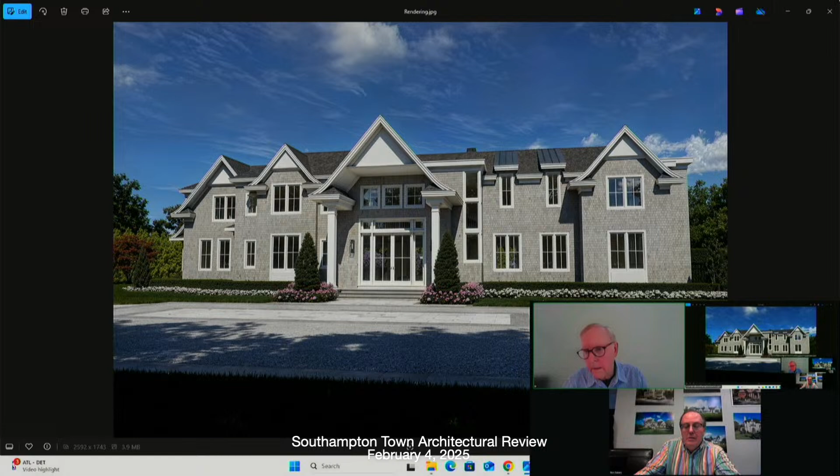Oh, Michael can't see it because he's not here. Okay, I didn't think that—right, he can't see our screen. Right, I got that one. It should be—yeah, do and shift. Yeah, I see one of them, but I don't see it large. Mr. Rump, can you see the rendering? Yes. Okay, I'm working on getting a few of them uploaded. Okay, fine.

Mr. Chairman, may I ask a question? Oh sure, absolutely. Kelly, is there a landscape or planting plan that was referenced—is that available? There was a landscape plan that was submitted by Piscatelli Landscape Architecture.

Okay, Mr. Rump? Yes, sir. My comments are going to be based on this—I wanted you to look at the landscape plan, because being a 10-bedroom house, is there going to be enough screening, and would there be noise abatement? I did upload a few of the renderings, which you should have access to. I could also upload the landscape plan if that's helpful, Mr. Chairman. Yes, it would be. Okay, yeah.

Are you able to share your screen rather than drop them in the chat? I do not know how to do that. I apologize.

20 Luther landscape plan, 1211, 1211. I think this is the latest and greatest. Let's...

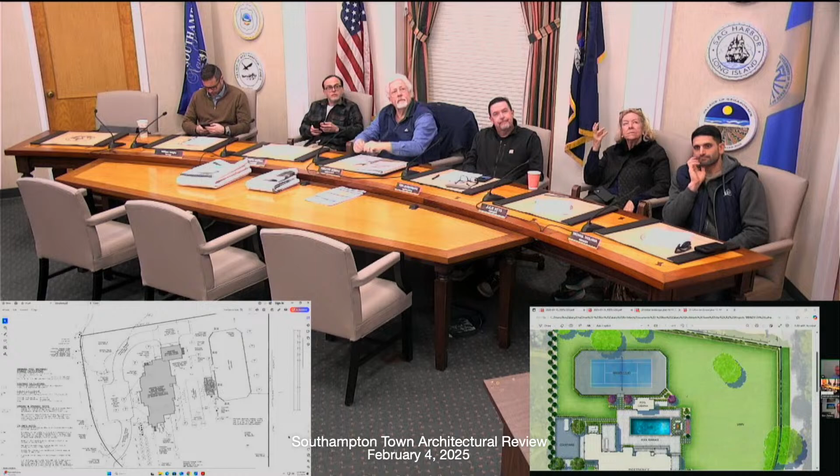Okay, check. Video, audio. Copy invite link, participants. Or share. Let's see. Okay, there you go. How's that? Yeah, we've got it. Yep. All right, good. Sorry about that. First time I've done that, actually. That's all right, we're all learning.

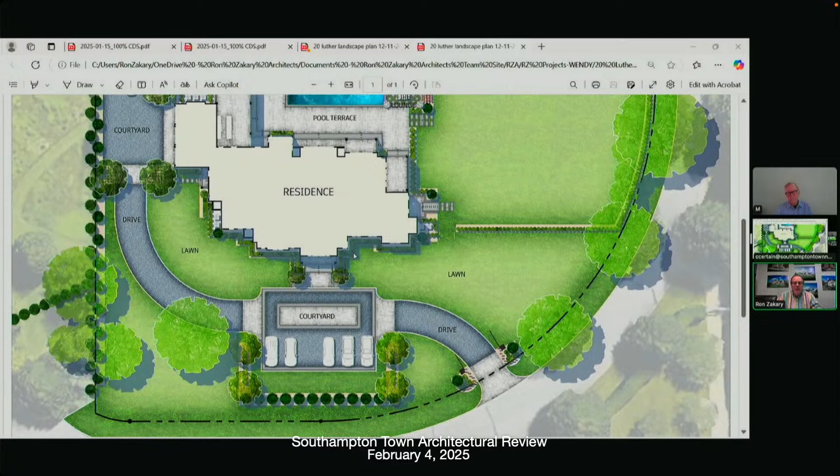Okay, so as you can see, the single curb cut, we have a courtyard opposite the main entrance, which will allow us to park 4 or 5 cars. There will be some hedgerow and evergreen screening for that motor court area. And to the left side, which is the abutting 8 Luther property, there will be staggered evergreen screening for the benefit of both 8 and 20 Luther.

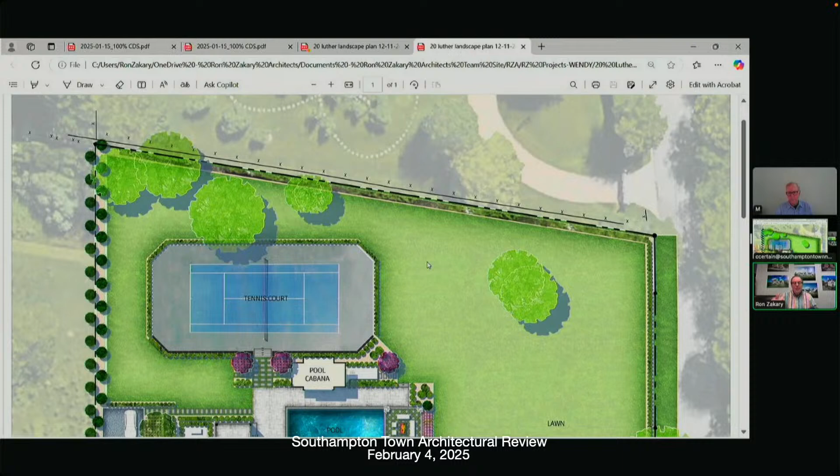There's a fair amount of vegetation on the east side. There are some large trees that we're going to maintain and some evergreen screening that's already there, so that side is already nicely screened. And then the definition of the lawn area to the right will be, again, evergreen screening that wraps from the right side of the front of the house towards the street and then continues on the curve heading east to that existing vegetation on the east side of the property.

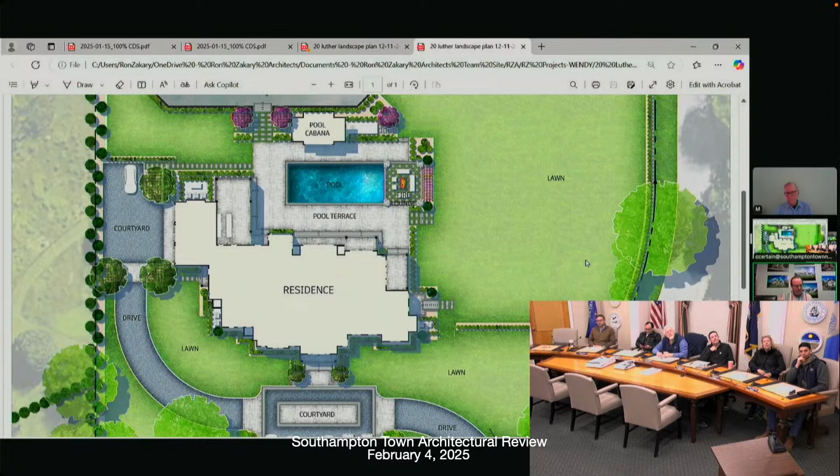So, Mr. Rump, would you mind commenting on my comments about noise abatement, and is this going to be sufficient screening? Well, I have a question for Ron.

It's so west of the hedge that's kind of defining that lawn area to the right, along the property line. There's going to be no screening along the property line until that kind of northwest corner. Is that correct? To the right of the curb cut before you get to the screening? Yeah, if you go from the curb cut, either left or right.

Well, to the left, there'll be screening that defines and encases the motor court area, or the courtyard as it's called in the landscape plan. And to the right, as you're approaching the house, there are a couple of trees that we're going to keep there, so you will still be able to see the house. But the privacy screening really defines the backyard area. That front lawn area will simply be open lawn, just so you could actually see the house as you're coming around the corner and recognize the driveway entrance.

So I didn't want to extend that existing vegetation all the way to the curb cut. The existing vegetation that's there is not shown. There's a few trees along that southerly edge that we would like to keep, and then the new screening would start from the right front corner of the house, heading west, then heading south, then heading east along the property line. Right. So what I'm asking, Ron, is that this plan does not show that existing vegetation.

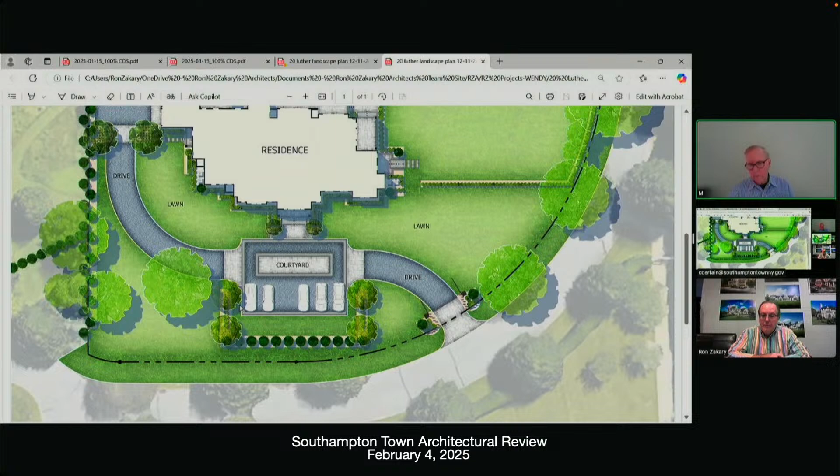Mr. Rump, comments on the design only at this point? I don't have an issue with the design of the residence. The only question I had, Mr. Chairman, is if the developer is doing a residence under construction next door - I don't remember what we approved for next door, and my hope is that it's not the same. No, it's not. It's a more modern look, I guess, is the best way to put it, at 8 Luther.

I could try to pull up a rendering, if that helps, of 8 Luther. Yes, if you could. It's a very different looking house. I guess the only commonality is it has a cedar roof. The windows are bronze, the siding is a different gray, and it's got more of a two-story glass wall look. So it's a more modern look.

I, for whatever reason, cannot pull up those files. Let me just see if I can - as long as Ron says that, I'll believe him. And that's just my concern, that we don't have a similar house next door to each other. Right, yeah, I vaguely remember it now. As he's describing it, it is different, and I believe there is enough screening on the house next door, the one that's going to be under construction.

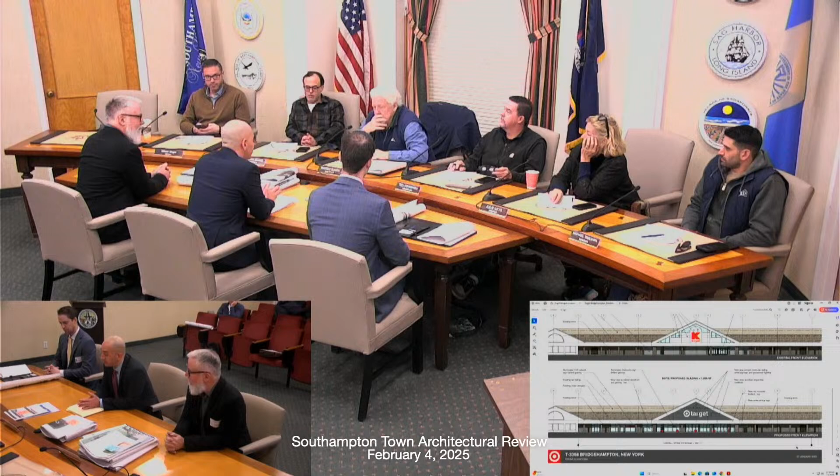Good morning, Mr. Chairman, members of the board. Brian Kennedy, partner with Forchelli Deegan Terrana, on behalf of the applicant. Present with me is Ken McQuaid, in-house architect with Target, and Alex Holloman, project engineer from Bohler Engineering. As the call of the meeting indicates, we are before the board this morning looking to occupy the former Kmart space at Bridgehampton Commons. It's approximately 91,000 square feet.

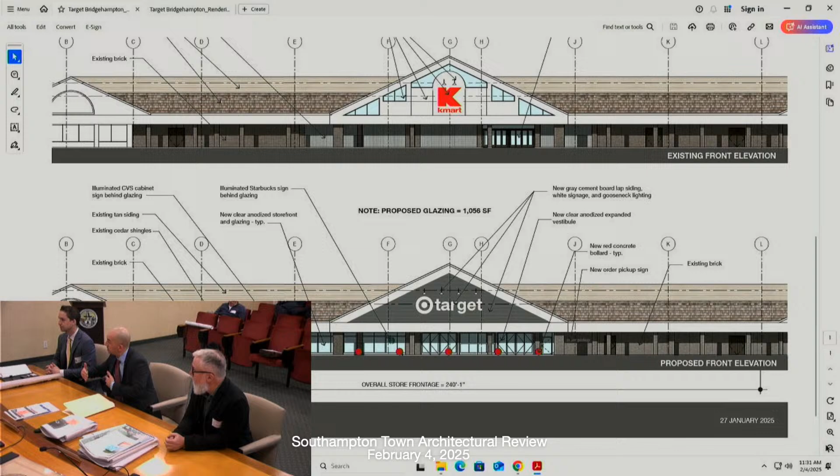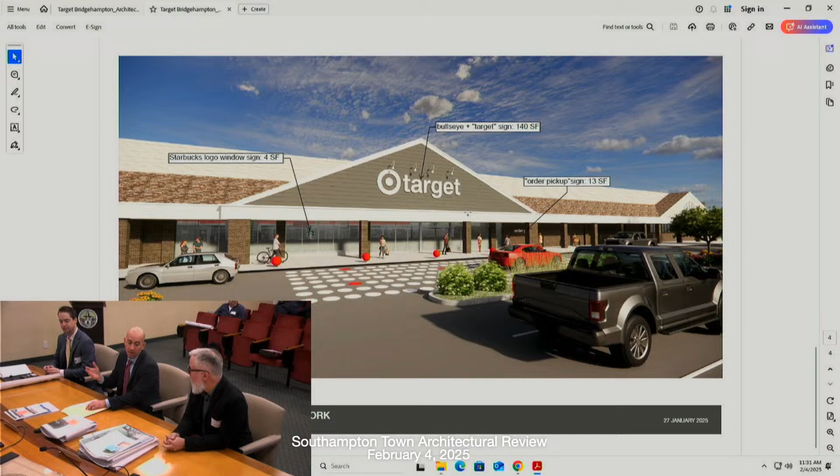As part of that occupancy, there will be some fairly significant upgrades to the facade. Additionally, the applicant is proposing the addition of 2 cart corrals in the parking area, which will trigger a minor parking variance. At the rear of the site, we're proposing some additional loading dock improvements.

At this point, I'm going to ask Ken to speak quickly to the proposed facade upgrades. Okay, thanks for having us. We're very excited to be here and be part of your community. I'm sure you're all familiar with the existing building.

It basically has the front vestibule of the current Kmart, and then everything else on the front wall is either brick or corrugated CMU from the original construction. And then there's a kind of a fan glazed window element up in the gable there where the existing Kmart sign is. So those are the two areas we really wanted to address in the design. The shopping center has a very consistent design, so we didn't want to do anything crazy.

The first element, the gable, we're proposing adding some gray siding to match the rest of the center and cover up the existing glazing, which you can't see through anyway. The main issue is our logo wants to tuck up in that half circle, and then it ends up looking kind of like the Japanese flag, like it's this weird red dot with a fan blade thing coming around it. And if you don't put the sign up there, it looks like it wants to be up there, but it just looks kind of strange.

So covering that up and putting in the gray siding really allows us to get our full horizontal lockup, and then we can get the gooseneck lighting over the top of it. It also just refreshes the exterior look a little bit and shows the public that there's something new going on.

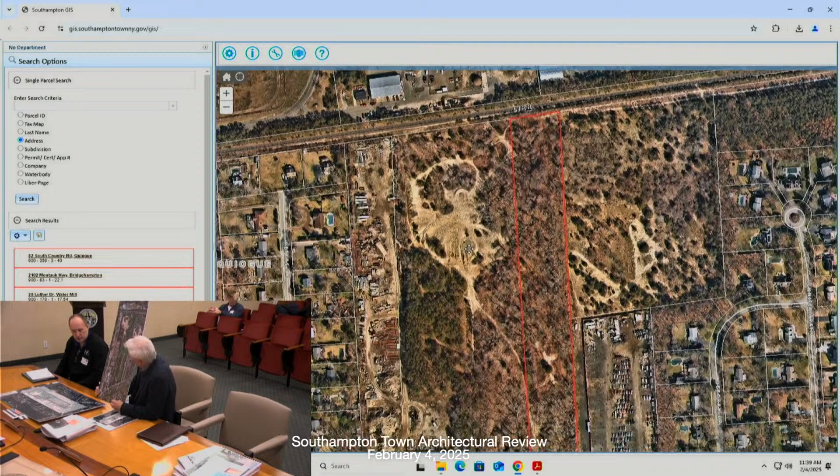Because of the past industrial uses, and actually current ongoing industrial uses, the town thought, this being PDDs being incentive zoning, that there should be an incentive for a developer to have some flexibility in uses of the property, provided there is a cleanup. We are presently undertaking the necessary environmental remediation plans, which are being reviewed by the DEC because of the impacts that were occurring. You can see the part primarily on the north part where there was sand mining taking place, but there was certain types of debris and metals that were dumped on the property years ago. We're confident that the DEC... they're not as significant as, let's say, the North Sea landfill kind of issue. So we believe we can develop this.

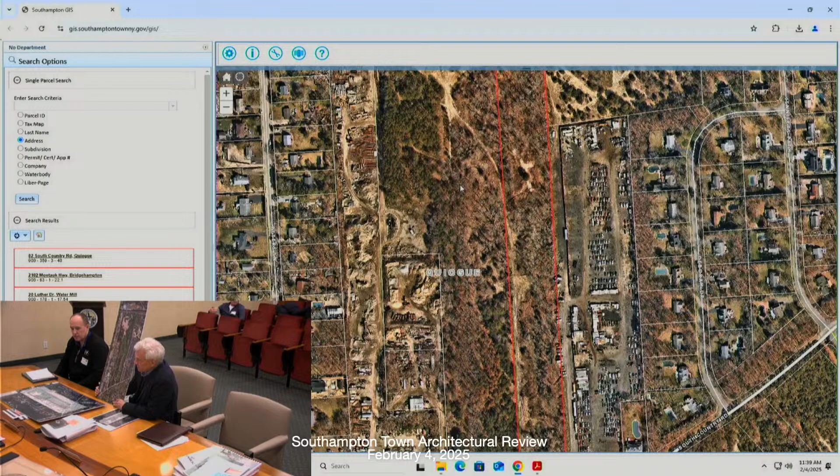Our clients are one of the premier car club recreational uses in the country. They have facilities, and Ryan can describe those, currently built in Florida. What they're looking for, a car club, is an activity where people with a hobby, more than a hobby, a real keen interest in cars, collecting cars, older cars, new cars, luxury cars, and they need a place to store them and actually share their affection of these cars with other people. This is something you may be familiar with. There's a lot of literature, and there is a website if you want to go there.

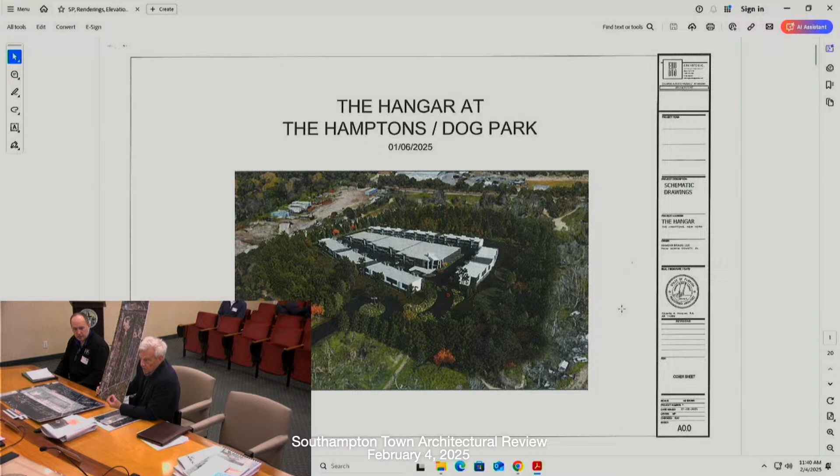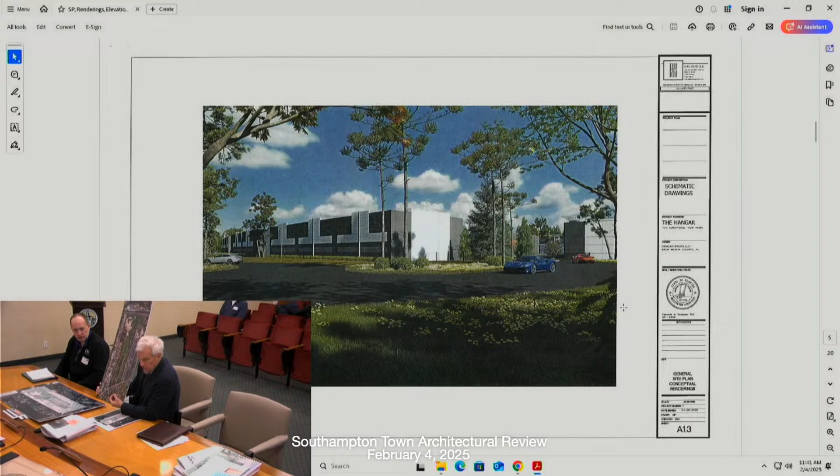So we approached the planning board and the town building inspector and examined the underlying recreational tourism PDD, and we inquired, and they did determine that this car club facility would qualify as a recreational use. That being said, the building inspector suggested, among other things, that because it's not unlike the private golf course, there might be some recreational opportunities on this property for the public. There was a suggestion that we consider pickleball courts dedicated to the town.

So we submitted a site plan application to the planning board, and it had our car club facility on the north. This is the same aerial with our plan overlaid, and this would be the Clark Car Club facility. But we had in this corner an area that would have been dedicated for pickleball courts.

Through the planning board review, however, we got input that pickleball, despite its popularity in one or two facilities, SYS and Red Creek being the two public facilities, that may not be what the town desires. Rather, they came back and strongly recommended we consider a dog park.

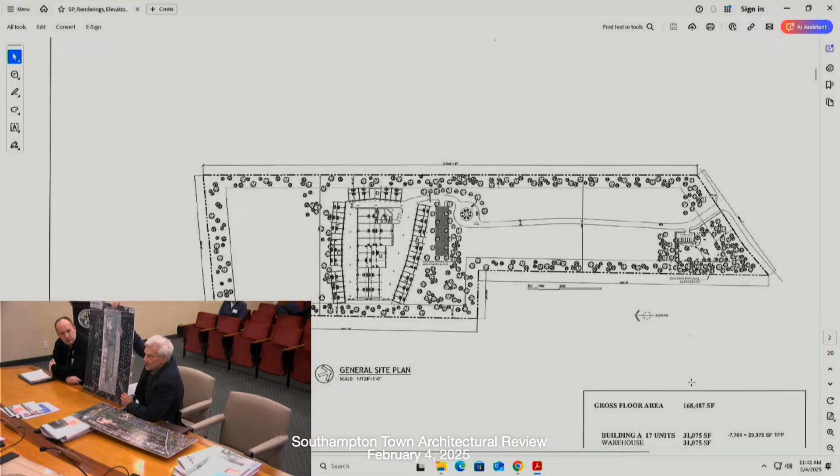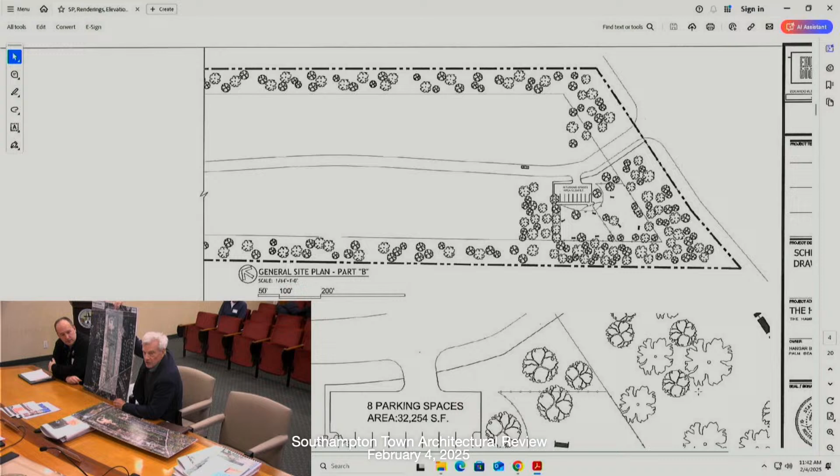So our final plans, we put together a plan for a dog park down in this area that the town board members have, we met with informally, and they're believing that will be more appropriate. The developer will construct and do whatever is necessary, parking and facilities, whatever the town is going to direct us with the dog park. We're not asking for your review, but if you want to, you can mention that.

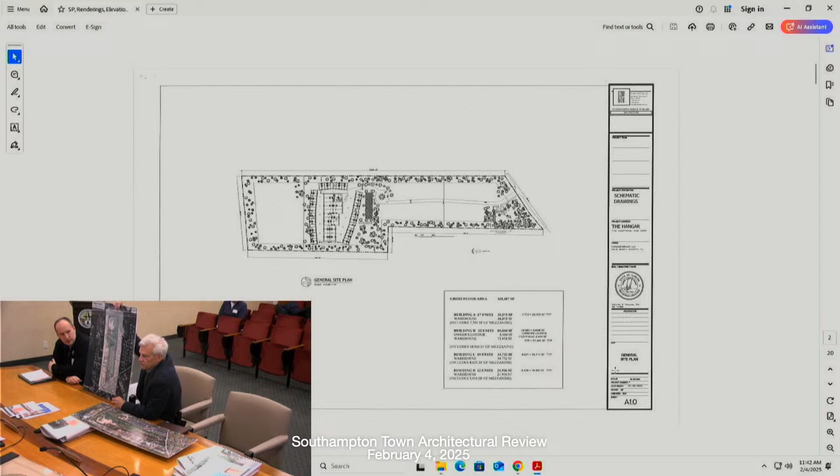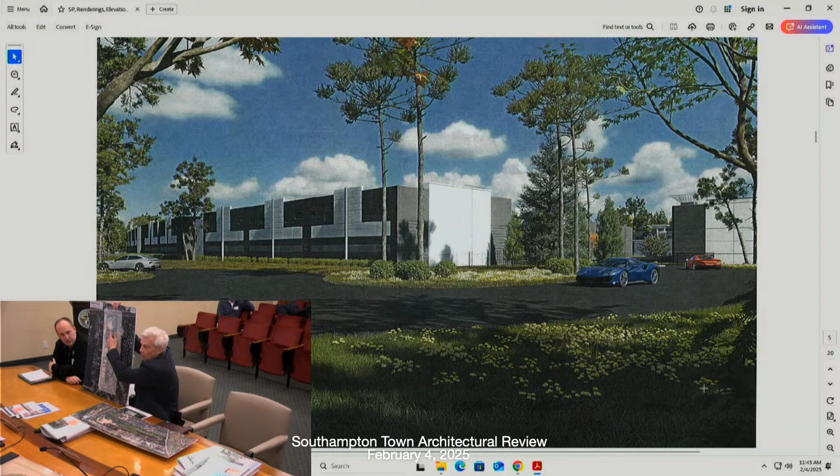We're here today because we did have a pre-application report, which I included a copy of. You can review it. But with respect to the architecture, the planning board had some general comments. They said, well, the underlying zoning is residential, and there is residential in the neighborhood. Could you consider doing certain things to tone down or make it look a little less industrial than it is? Even though we're 1,500 feet off of Old Country Road, the general public won't see it.

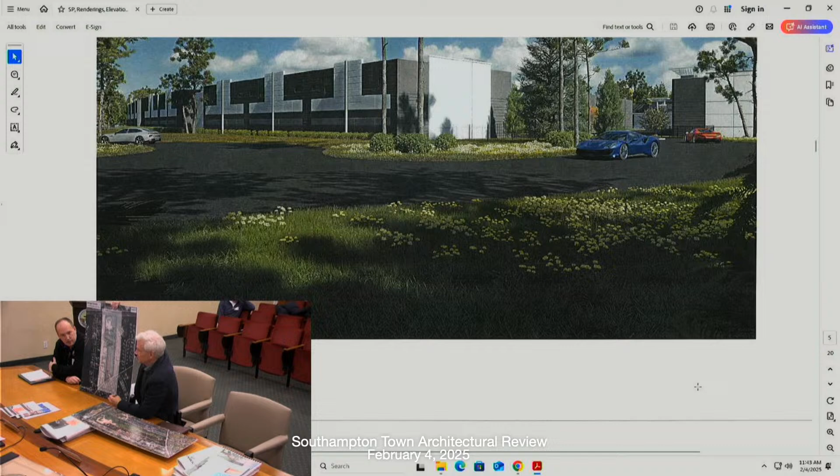We have these ongoing industrial uses that don't look like there's going to be any slowdown in them disappearing soon. And we are adjacent to the county airport, which you'll hear is part of an inspiration as to the architectural style that we're looking at. And in particular, this Westhampton Beach DPW buildings are immediately to our north.

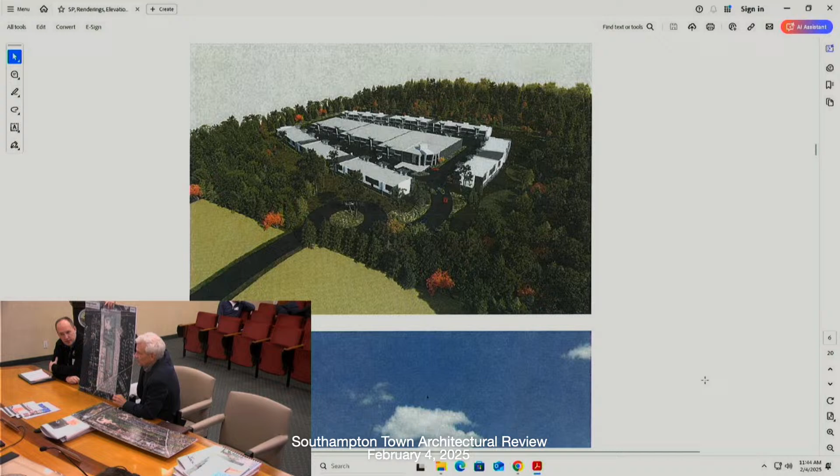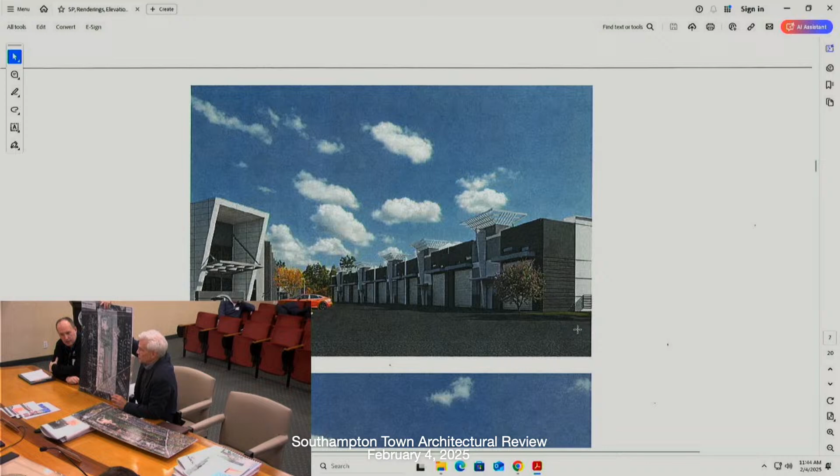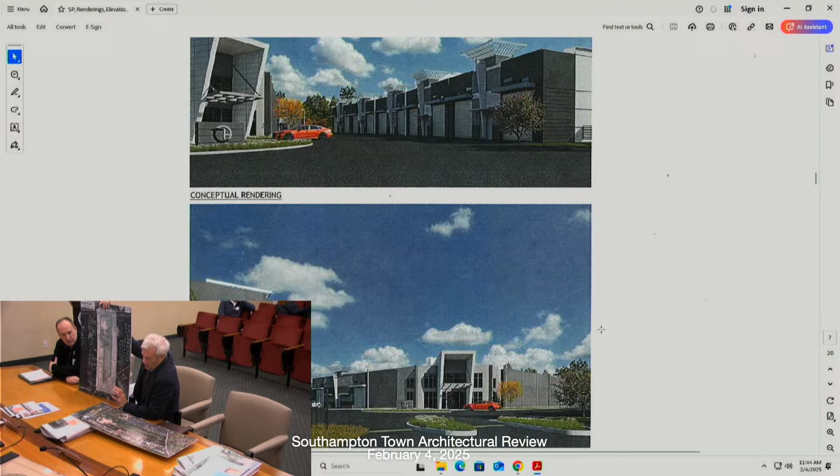So with that, there is a general site plan, but you'll see that this facility, its inspiration was the existing facilities in Florida. Our clients are residents of Southampton town, and they presently store their cars haphazardly in many different places, old potato barns and the like. This would basically be conditioned space. There'll be a number of units where you could buy your unit and basically store your cars and other materials as you may want. And there is a lounge area where the members would be able to congregate and share their stories and their pride about their vehicles.

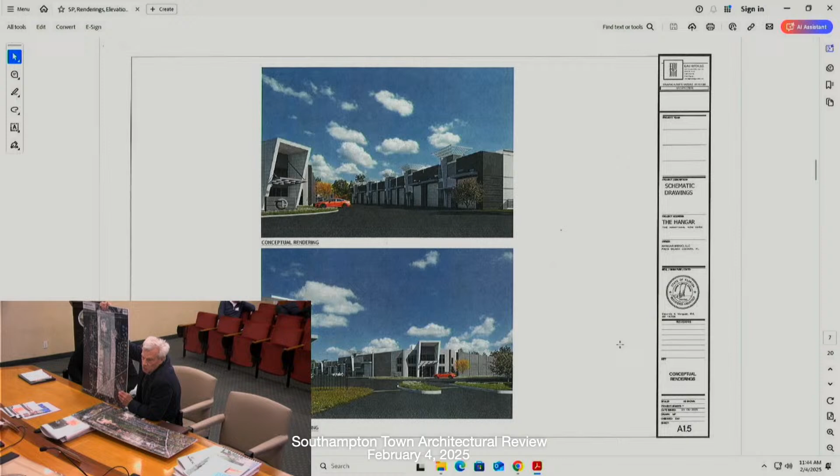So I'll let Ryan take over on the architecture. What we're looking for is your preliminary input, any suggestions you have before we put together a final application to the planning board. And they will, of course, at that time also refer it to you formally for their response, and I really appreciate you giving us this opportunity to meet with you and get the inputs.

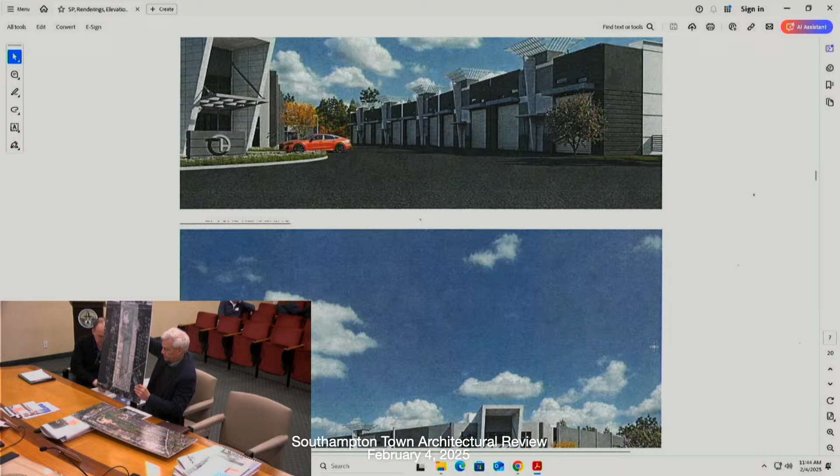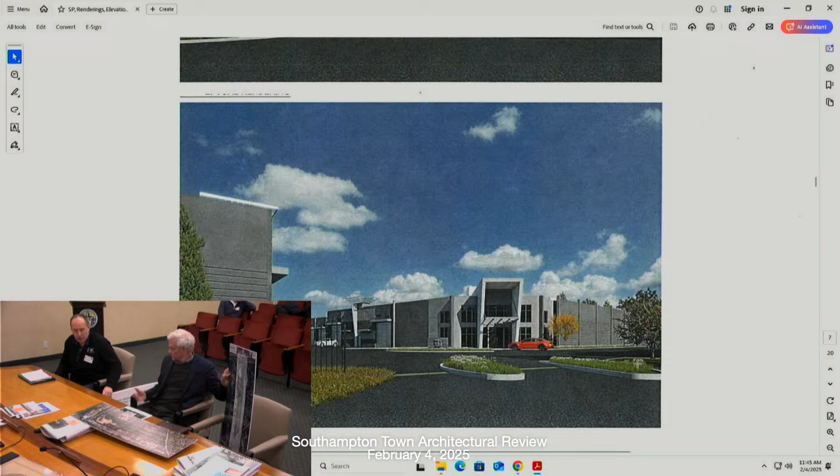And I don't know if, Mr. Chairman, can you see any of the boards? We'll try to, I think we emailed all the documents. Yeah, I have them up here. Okay, perfect. Can you share your screen? Is there a way to do that, with Michael.

Mr. Chairman, have you seen the architecture and the renderings that Ryan has prepared? Yeah, I'm looking at them now, but they're really small. Okay, so I'm going to have to rely on the rest of the board on this.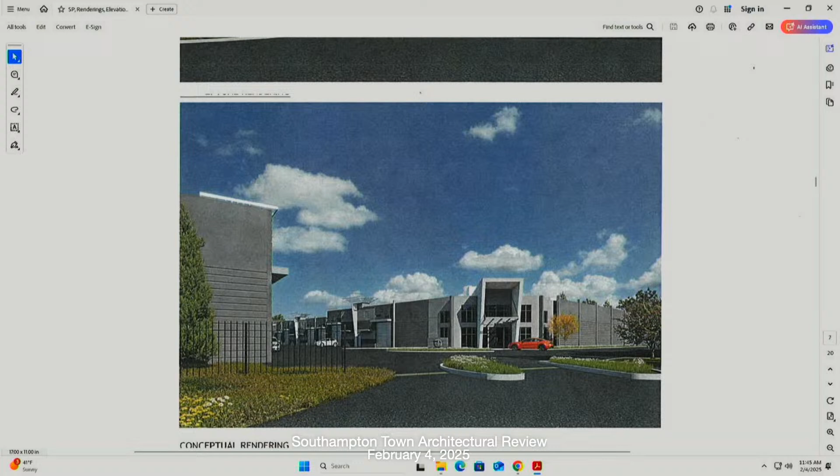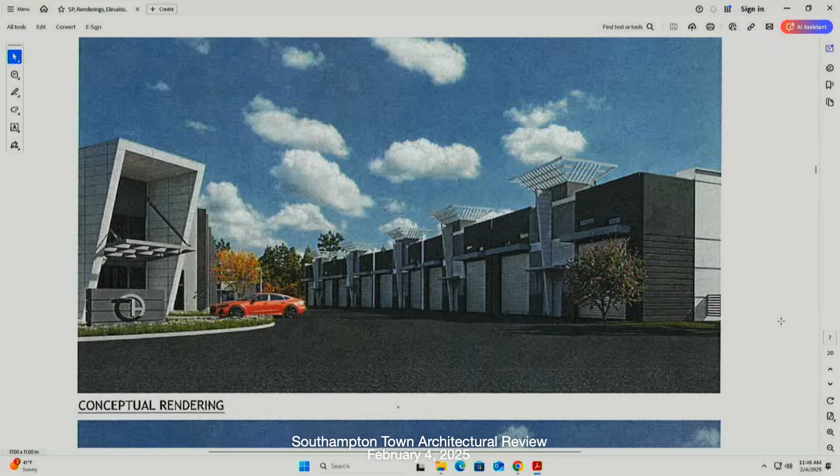Morning, board members. Good morning. Nice to see you. As Wayne said, this is the premier car condo company in America. The inspiration behind the design is high-end airplane hangars and F1 hangars and stuff like that. This is an inward activity facility. In other words, anybody that's doing anything on their car, showing off, washing it, doing whatever, is not going to be in public sight at all.

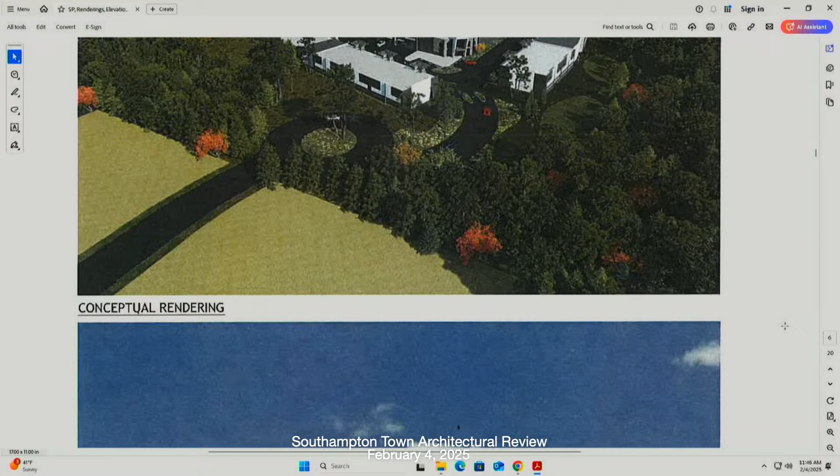It is completely screened. All the activities are to the inside of the building. This is actually where you would drive up. It's a circle area here if you want to back out, and you go in there. All the doors are facing inside. You can't see anything that's going on there. There's no auto repair shop, nothing like that, nothing going crazy, no chemicals, or whatever.

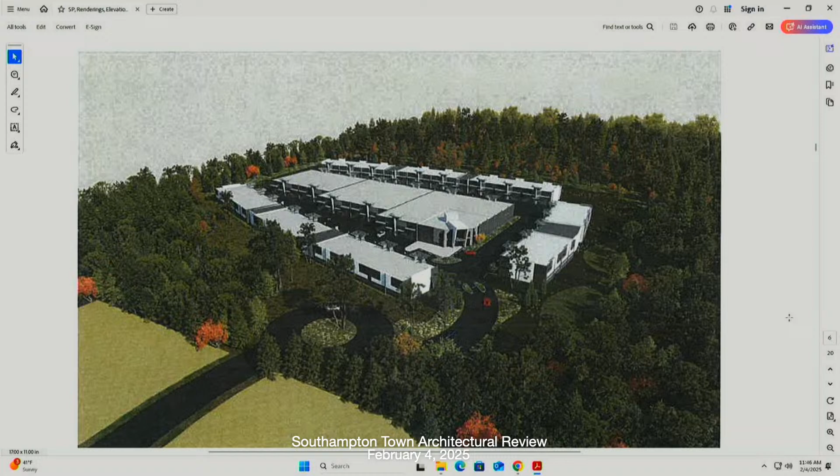With regards to the design, it is a precast concrete panel, and what they do is they just go and score the lines in there. The drawings are a little bit busier than what you would actually wind up seeing. This is more accurate to what would actually wind up being built right now.

So originally, if you go through your packet, you can see the ones that are in Florida, and you'll see like a lot of red on there and stuff like that. So what we opted to do is go with grays instead, tone it down a little bit, make it not so, yeah, it's as built, but a little bit too in your face kind of deal. I can check that out. So we went with grays and off whites and things of that nature.

We also were required to break the massing of the building a little bit by the planning board, which we did do, and we still came out with a beautiful product. We also have different recesses and things of that nature to kind of break it up.

Can I ask you a question? Sorry to interrupt, but these grander recesses, are they on here or not? No, they're on here. Right, absolutely.

Sure. We opted to break it up with different colors and stuff like that because it's a big white building. It's overwhelming, it doesn't look right, it's no good. So we break it up with different colors and different patterns with concrete.

Again, keep in mind, this is 1,500 feet. I mean, that's what, five football fields? A giraffe can't see this thing from the road. So we have some aerials here.

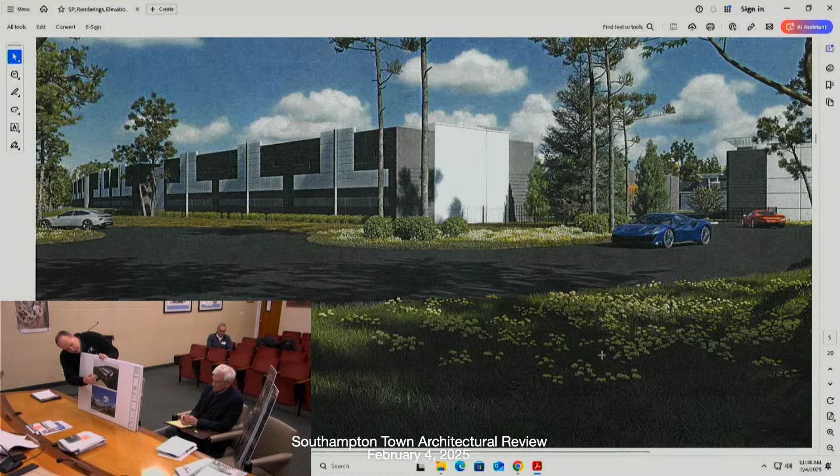Again, this is really for really high-class cars, things like that. You're talking Lamborghinis, Model Ts. This is not going to promote anything egregious or anything like that. We've made every effort to accommodate everybody's comments and adhere to everything.

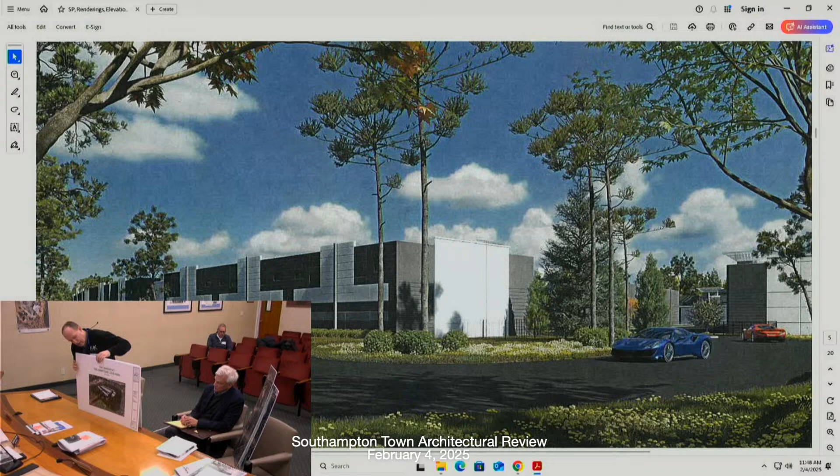Okay, does that conclude your presentation? Do you have anything else you'd like to add, sir? Yes, sir. I think one of the things we did originally was look at what recreational buildings were out there.

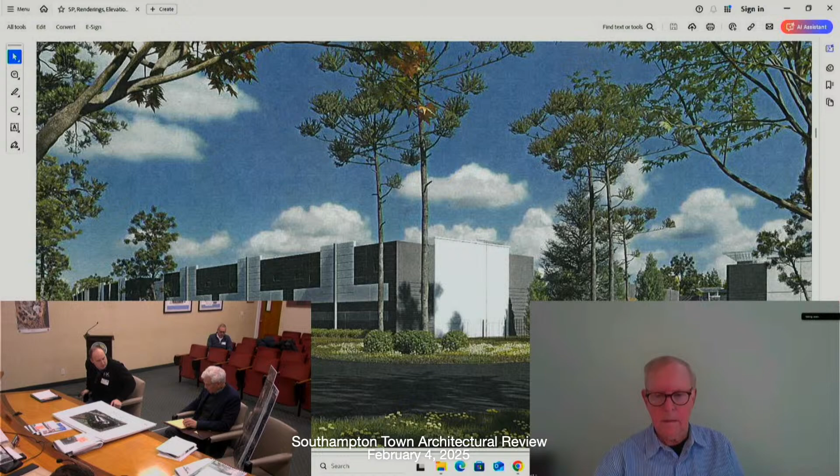I think one of the things in here was, what's the name of the facility that has a car club in it? Oh yeah, Rally Point. Yep, Rally Point. This is way above Rally Point.

In fact, one or two planning board members suggested that we look at that. We did, but I think you can see that this is, we believe, a step above that as far as the quality. So this is also all self-contained on its own site.

Rally Point, you've got the parking out there. I don't know if you guys have ever been to an event, but this is much different. This is all self-contained, it's not really open to the public per se. If they do have something, it's for members only, things of that nature.

Also keep in mind, we have Chesterfield on one side. They do foundations and piles, and that's going to look like a war zone until whenever. And then you've got the junkyard on the other side. So we are doing everything we can to beautify the surrounding area along the way, and I do believe this absolutely fits with that context.

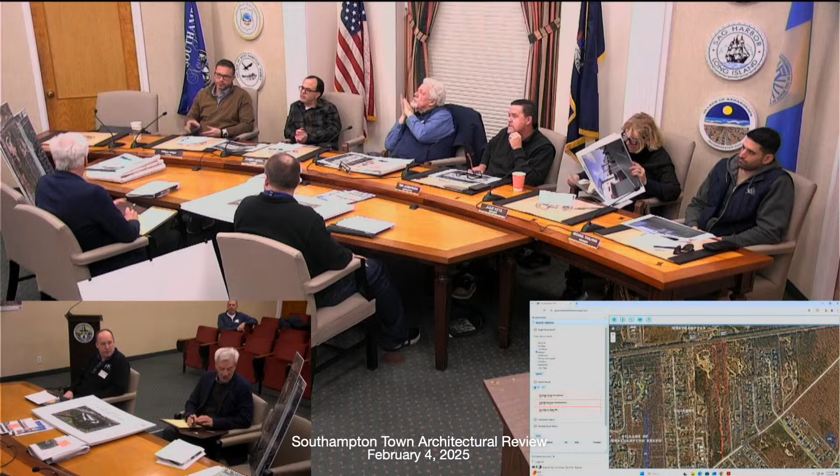You'll put in all your own stuff. We had a couple of comments that people are anxious to have something done on the property because there's so many kids with recreational vehicles and dirt bikes that are constantly using the property.

Okay, Mr. Rump, comments? I have no comments. I agree with the lead. Okay, thank you.

On this, Mr. Burke, comments? No comments on the design. I think it's a cool concept, and I like drawing from the airport, it's cool, looks really good. The public part, I know that's way out of our purview. I'm interested in how that'll shape out.

I'm glad pickleball's gone. Everybody hates pickleball, everybody hates the noise. I'm curious if tennis was brought up, or basketball courts, or what. It's all the above - we sort of said, what do people like, the dog park, whatever. Pickleball was the first choice because rather than have a pickleball court in everybody's backyard, have a public place where you could design and try to mitigate it, and it's a little farther from residential areas. But nonetheless, the comments we received were, let's not do pickleball, but we need a dog park.

Just to add on to that, because of the construction going on in the Village of Westhampton Beach, which is still kind of our purview - you see all the condos and stuff coming up - you kind of do need a yard for the dogs to run around. I think that fits what's going on in the process in Westhampton.

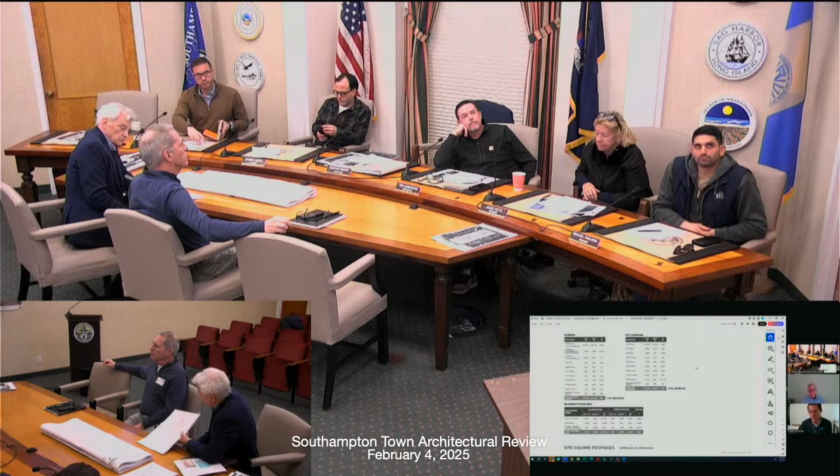So an enormous amount of time, energy, and focus by our team and the Collective Hills team to ensure that we are trying to maintain very close square footages, scales, materiality across all of these structures, even the ones that are being newly introduced. And we've identified on subsequent pages exactly how all of these shifts and moves have sort of reallocated themselves.

So in total, there is a less than 1,000 square foot increase to the total interior space. That's the 885 square foot value at the bottom of the upper left-hand table, which represents a 1.4% increase across the entire site for all of these structures. A 430 square foot increase to the overall lot coverage, again significantly less than 1,000 square feet, shown in the upper right-hand area, which is a 0.9% increase to the total plan. The basement floor area has a slight delta as well at 343. All of this was in an effort to keep this as consistent as possible to what was previously indicated.

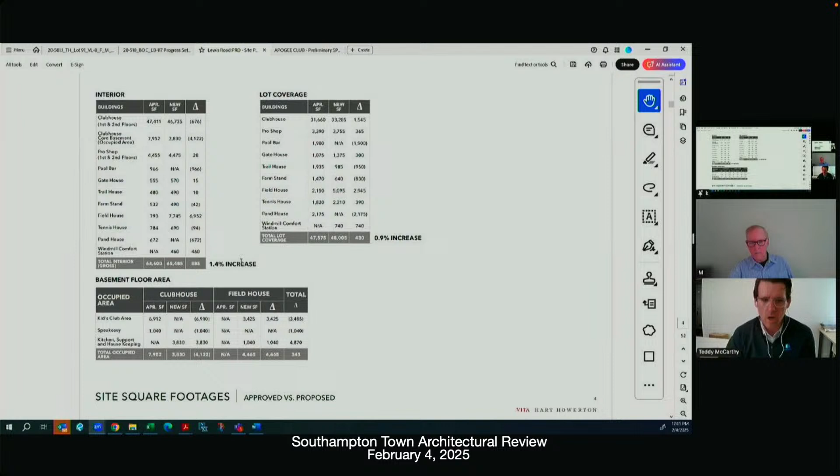As we look further into some of the specifics of the overall impact, obviously vertical construction and the architecture is a big focus of this board. However, the overall impact on the site and the coverage of the site is also very important to us as an organization and as a development partner. So the total delta here actually significantly reduces the overall hardscape being used across the site.

So there's actually a 23,000 square foot reduction in hardscape when you qualify everything from concrete, pools, decks, sports courts, and so forth, and even some of the minor pavilions. So ultimately, that grossly outweighs the slight increases in the square footage indicated on the prior page.

So the way we've organized this, and we can kind of quickly flip through this, is we've tried to identify and plan those proposed modifications, prior locations of pools, new locations of pools, so an overlay between what was previously approved, which are the dash lines, and now in black and white, the current proposed site plan. So you can see the pools have changed significantly, but are generally still in the same area.

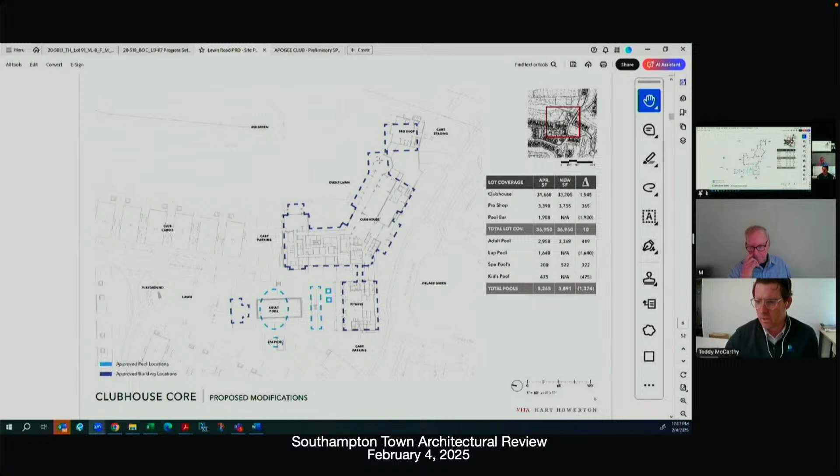That pool bar building has been removed, and as we've worked through the clubhouse structures, which are identified as a series of structures here, we felt it beneficial to rotate out that pro shop, given the location and the proximity to the golf course and the orientations there. Ultimately, the general look and feel of this structure is, I believe, quite consistent between the approved site plan and where we are today.

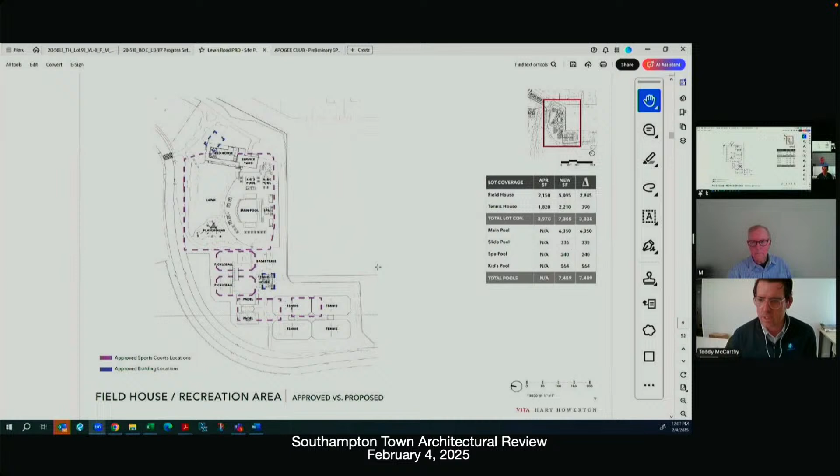That extends further into the conversations around the field house in terms of the approved sports court locations and the approved building locations. This was a smaller structure before. We are really trying to use some of those reductions and the removal altogether of the structure to increase the square footage of this building. It's just frankly more efficient to keep these together, keeps staff in one place, and helps really operate this place more efficiently. You can see that again, site plan approved versus site plan proposed there.

There are then, through the next 40 or so pages here, we've included the previously approved plans and the proposed plans for each of these areas. Some key factors here: there was in the lower level of the clubhouse some program space. That program is now being moved to the field house. There was a kids club or kids area here. Now we have all parking below there, as well as support spaces.

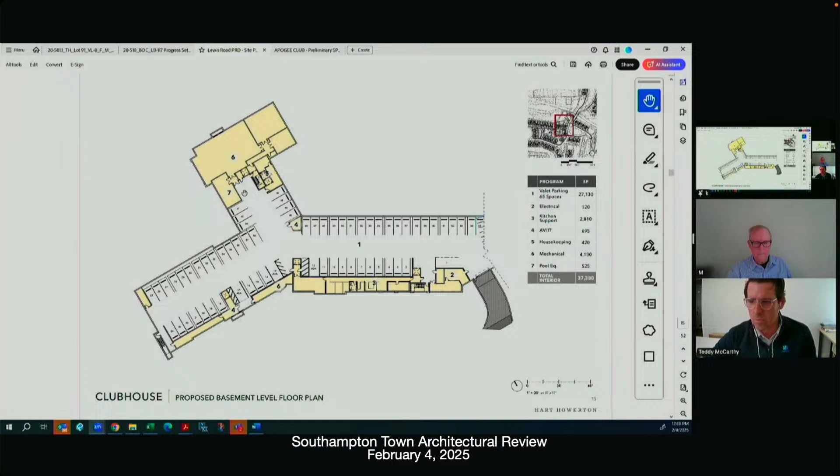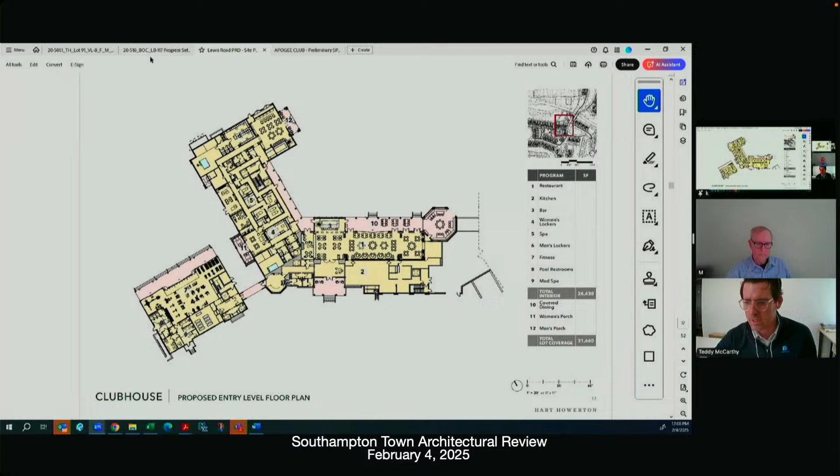As we move up into the spaces on the main level of this structure, the approved plan and the proposed plan, obviously just things have gotten much more detailed in terms of how these two plans are operating, but effectively they're still doing the same things. There's a restaurant, there is the locker and locker support spaces, and there's the fitness components, and that's still consistent between the previously approved and the currently proposed plan. And then finally, the second level plans, these are the individual residential units up here.

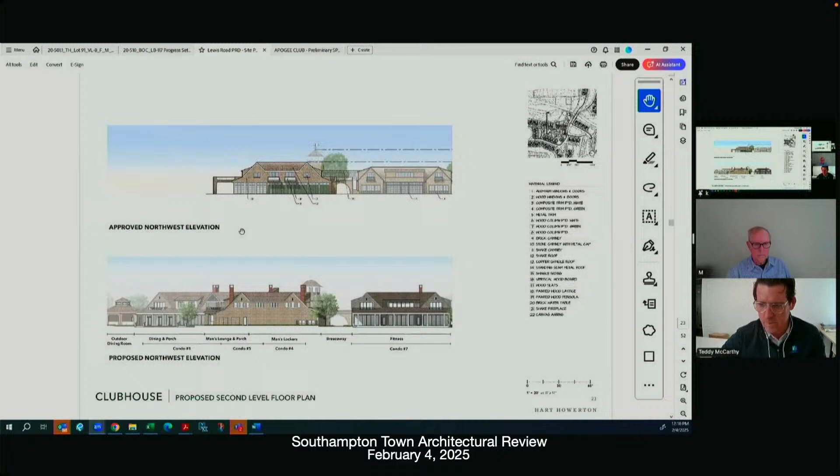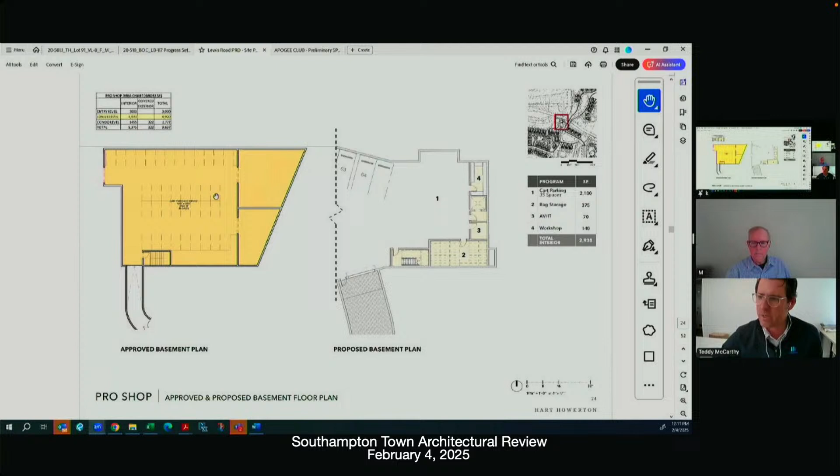And we can continue to run through these by elevation. This is also, I believe, hopefully in each of the board members' hands as well. For the purposes of how the structures are organized, the pro shop, which is located adjacent to the clubhouse, is separated in this, so that we're consistently showing it separated, albeit on that site plan you'll notice those buildings are read almost like a continuation of each other. So we've broken that pro shop out.

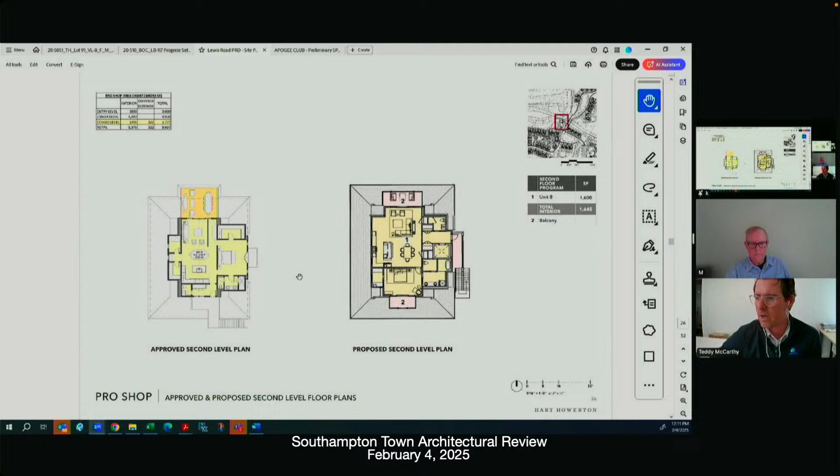Again, approved is on the left, proposed is on the right. Really just refinement, working in some of those porches, those lower shed roofs, to help reduce the overall feel and volume of the building as viewed from the outside, and further development of the small unit above the pro shop itself. Again, approved on these smaller structures, we're able to show these side by side.

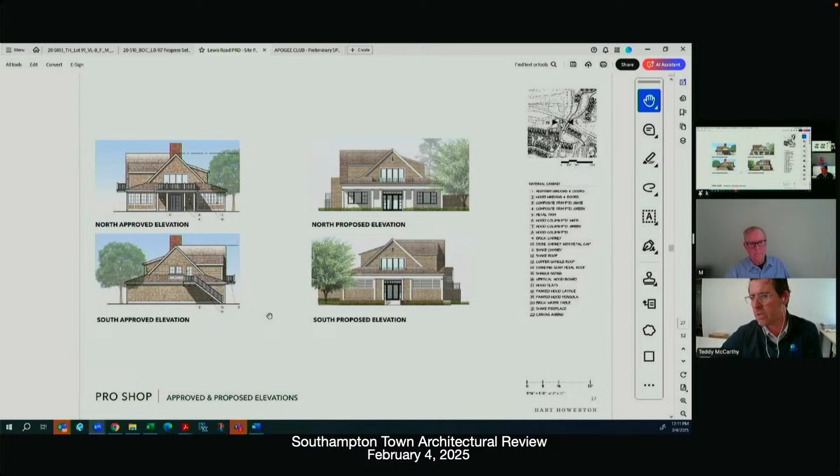So the approved elevation is on the left, proposed elevation is on the right. Similarly, as we've developed here, left and right, with same materiality, same consistency of windows. We're playing with some of the refinement of the trim details, bringing in some panel language at the dormers, identifying areas for some decorative wood louvers that are also functional in that they have some concealed mechanical components behind them, but still maintaining the brick water table, the cedar shingle sidewalls, as well as roof.

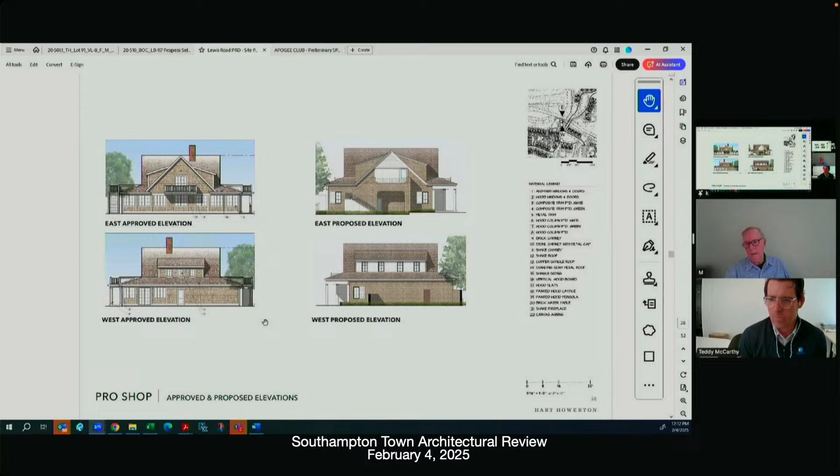We do have aluminum clad windows and doors that are white on the outside, and that brick comes back in with some of the chimneys as well.

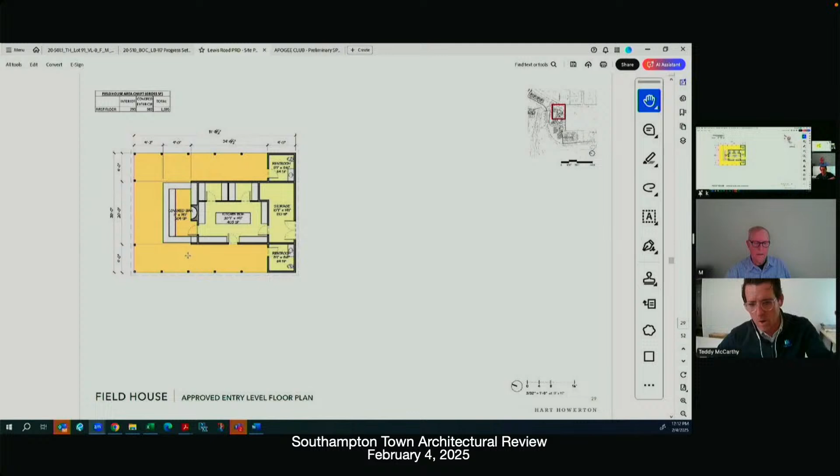So as we shift over now, we're on the whole other side of the site. The field house was previously denoted as a porched grill structure. We've taken that pool bar, removed its square footage, brought it over here, taken some of the kids club components, and really trying to take advantage of some grade change existing on the site as well, to bring all those more casual amenities together into this one structure.

So we have expanded this upper floor to include more interior dining. We have a kitchen that's been expanded to help service the pool area as well. Below this, really in the basement, it's tucked into the grade on three sides. We've brought that kids club programming that was previously at the clubhouse over here to this structure. This kitchen supports the pool area as well as the additional smaller kitchen above, and then everything else on this floor is really kind of a kid's dream. There's a game room area to play games, and two small bowling lanes, as well as restrooms that help support the pool area as well.

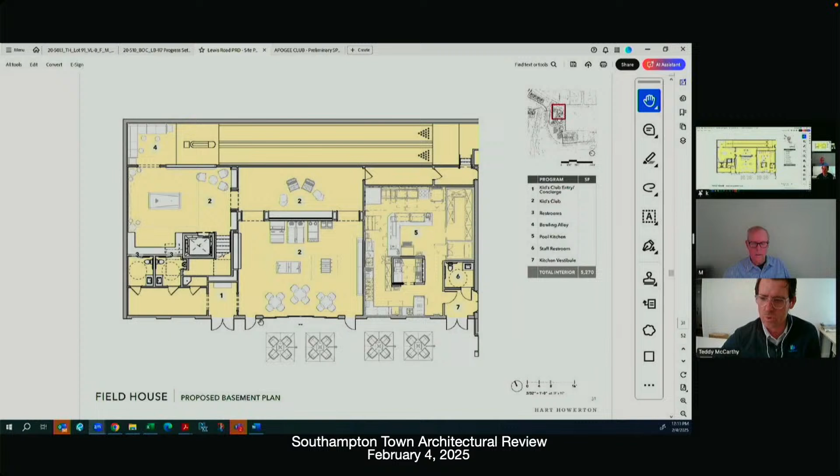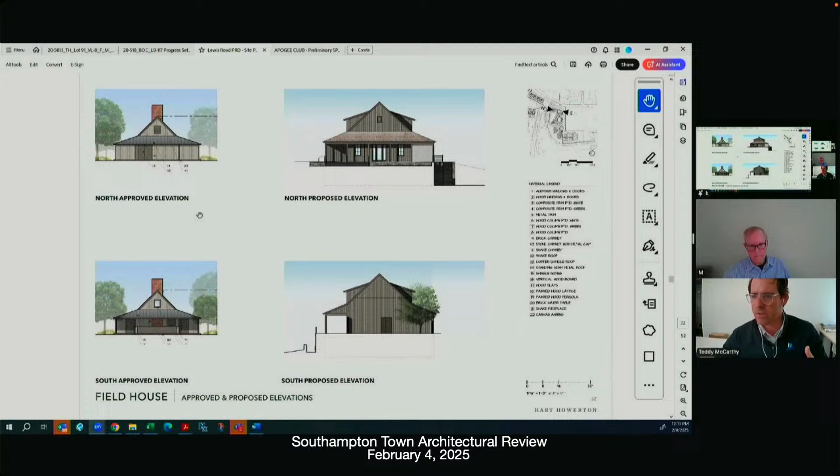So obviously this was a smaller structure before, but we've tried really hard to maintain a sense of scale in terms of how we've moved from the approved elevations into these proposed elevations, and it's really just on that one elevation where you see the lower level that you start to understand this is a larger structure. That's the south proposed elevation, which is tucked into the ground, while all the other elevations are trying to maintain a single story look and feel to it, with just the bringing in of those dormer windows to bring some light into the upper shaped ceiling of that space.

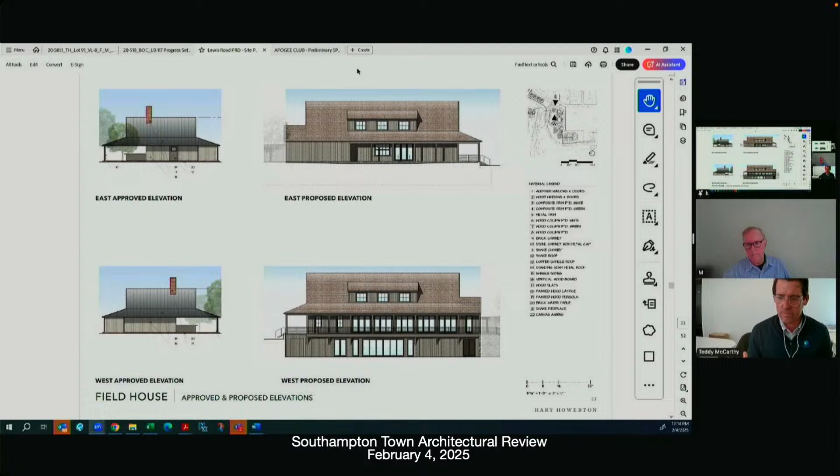The materiality of these secondary structures has been intentionally somewhat different from the clubhouse. The clubhouse was a more classical, traditional shingle style architecture, while these secondary structures took on more of the agricultural look and feel of surrounding farms, using a more rustic board siding while still maintaining the shingle roof. We do have some metal roof in other areas, really just trying to create a more natural look and feel to the trim language and overall feel of these buildings, as opposed to the slightly more buttoned up feel of the clubhouse and gatehouse.

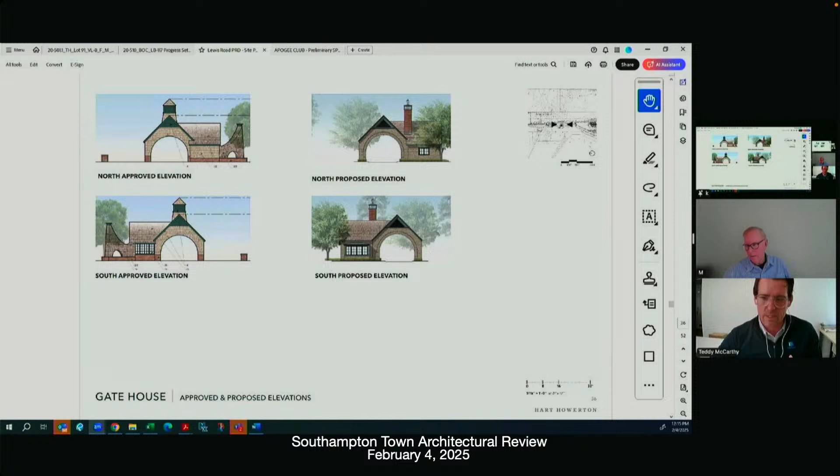From a scale perspective, we're trying to tuck this building into some existing trees, and we felt you weren't really getting the benefit of that cupola in terms of how you were approaching it. So we've removed that and drastically simplified the outdoor fireplace, which previously had a unique architecture that we felt was a little less consistent with the traditional shingle style we were trying to propose. So the language of this building is still very consistent with the overall massing and materiality, but takes on a slightly simpler language.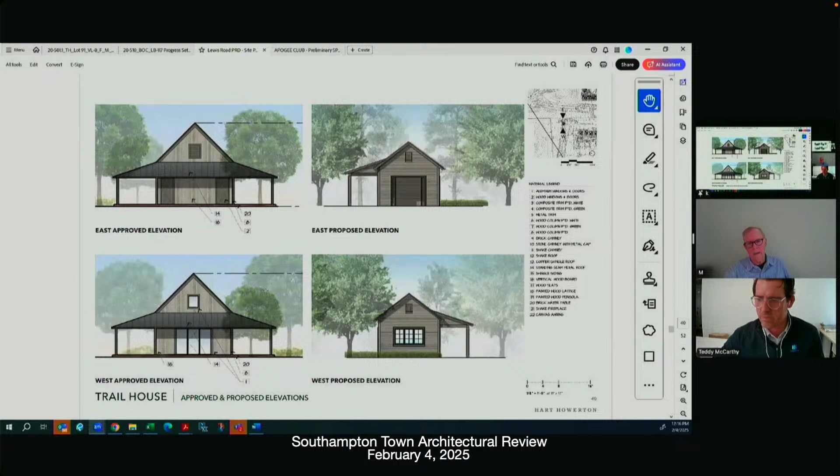You can see from the other elevation a smaller vertical footprint. On the farm stand side, this structure also abandoned the wraparound porch in favor of a trellis on one side, as well as a small bracketed shed roof on the opposite side.

We took the use of this simple gable and reintroduced a simplified version of the cupola we lost on the gatehouse over on this building, just so it had its own character that we thought was appropriate. Both the farm stand and the trail house do maintain the metal roof.

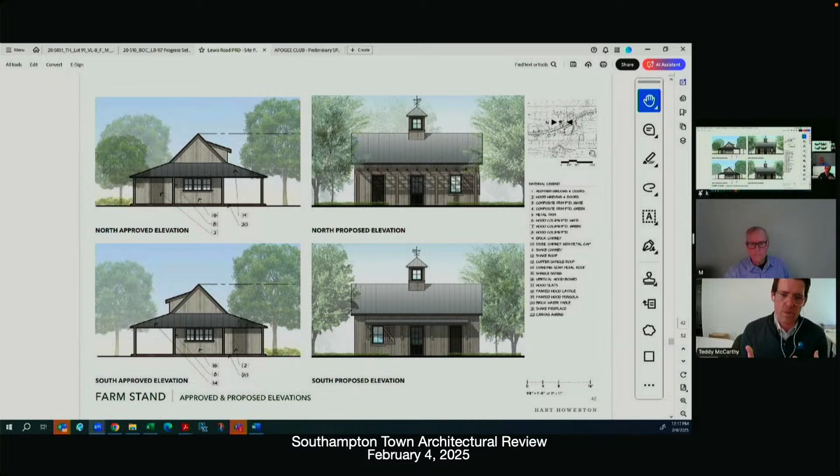It's rendered slightly differently just because we think this is more consistent with what it will actually look like. It was a little dark in those original renderings. These are a mid-tone standing seam aluminum, which are already in use on a number of the residential homes currently being built.

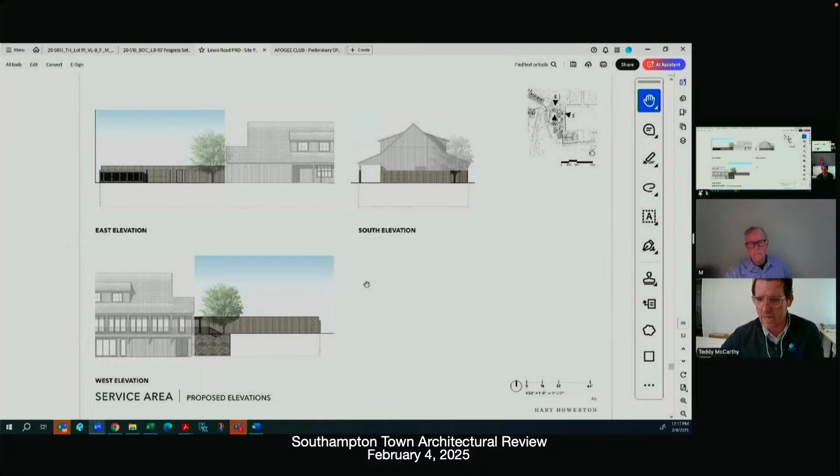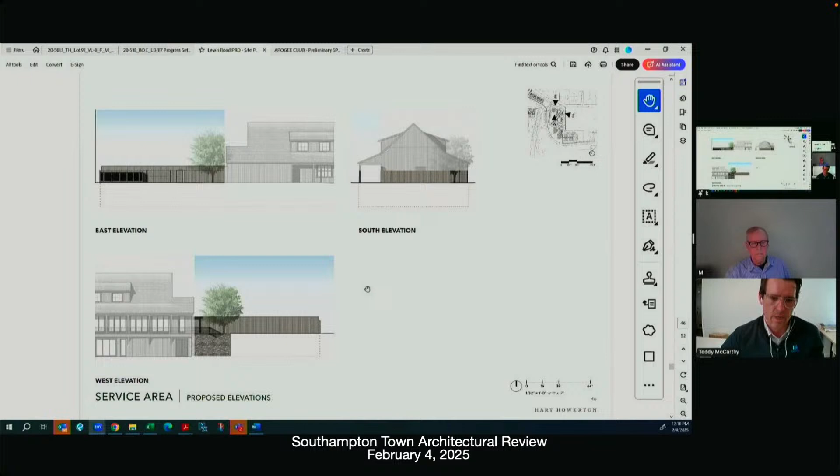And then finally seeing that from the opposite direction. This gets into a small service area adjacent to the field house, which is effectively its own element because it didn't exist previously. We wanted to make sure that was addressed and discussed with the group. It has a very simple cedar vertical plank fence that we intend to either use reclaimed material on or apply a wash to, so it has that gray, bleached out, rustic look.

And finally, the tennis house. I appreciate everyone bearing with me here—there's a lot of buildings.

This is also intended to be very consistent in scale to what it was previously, but we've reduced the amount of storage and scale of the small area where you'd walk in and grab a water, in favor of a slightly more robust restroom area, just because that's on the south side of those pools.

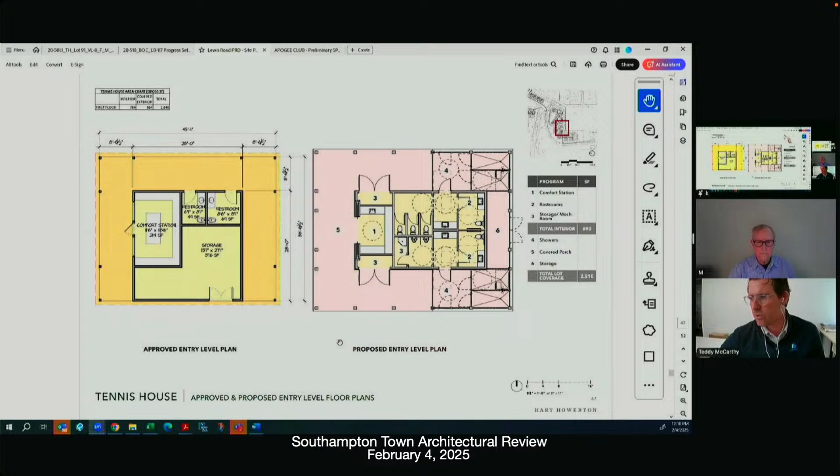We do expect some traffic down from the kids area and pool area, so we've created a slightly more robust men's and women's restroom with some outdoor showers, but they all tuck within this lower wraparound roof. The language of the architecture is pretty consistent here, but we do have these infill boards that help provide some privacy in those outdoor shower areas.

And finally, this is a new building we are proposing in lieu of the previous pond house. This one is going to be much more functional for the group, creating a small comfort station, grab-and-go area, and restrooms for use on the driving range, which isn't directly adjacent to the clubhouse like at many clubs. This allows someone teeing off on the golf course to go to the bathroom or grab something at a building more closely proximate to the start of the golf.

In this instance, we took a different approach that we thought was interesting, consistent with the language of the East End of Long Island that I grew up with. We're excited about exploring the potential of a windmill at this location. We're still working through the nuance of how the functionality could work, but we loved the iconography, speaking back to the historic windmills about to grace Westhampton Beach again, where my family's been for many years, as well as those used at National Golf Links and other locations as historic beacons. They're special, and they tell a story, allowing someone to talk about a place where we meet, where we come together as a family or friends, as a meeting point across the site.

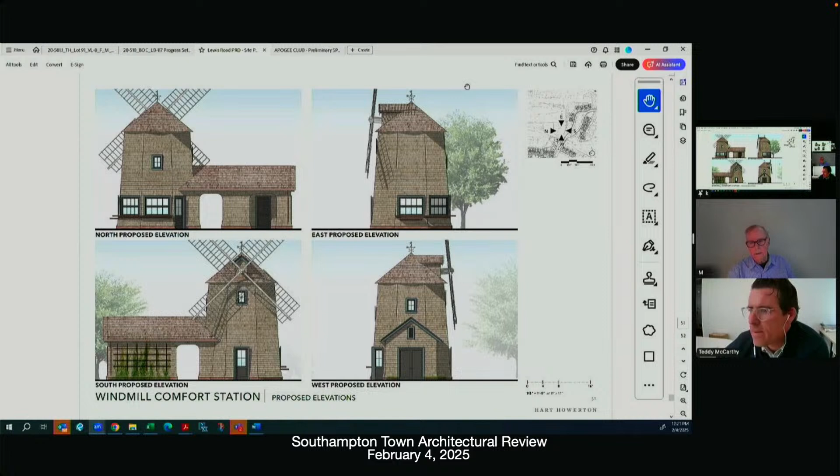Okay, well first of all, Mr. Jankowski's the lead on this area. Mr. Jankowski, comments? Before you go, I don't know if the board members were able to follow everything so quickly, but this little booklet, I thought everybody would have had one. But just what... No, I get it.

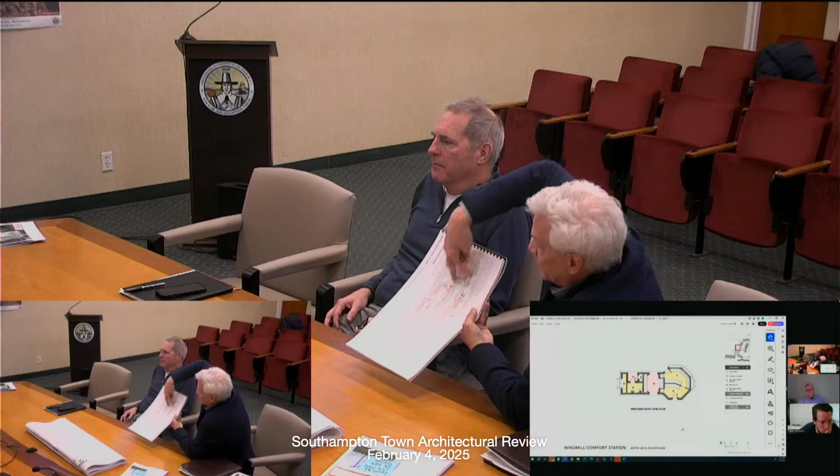What was described: this is the railroad and the project going north, and this is the main area of the clubhouse. It was very important that the planners advised us that if we were going to make modifications, we utilize the existing floor area and spaces already there. So the pool bar building's activities were modified and moved over, incorporated into the field house where the recreational facilities are. Each of these, other than the last comfort station described, which was located at the pond, was being relocated closer to the driving range at the first tee. So those are the major modifications, pending site plan approval, administrative site plan approval.

So we are looking for your input as to all these changes. I know it may be overwhelming, but we're certainly here to hear your input and questions.